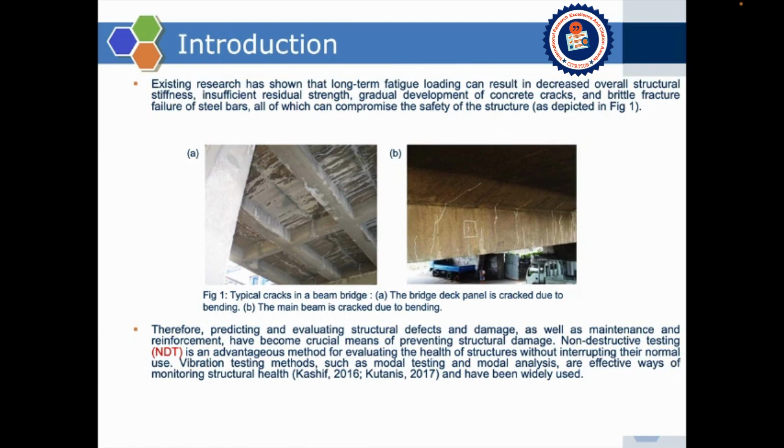However, comprehensive finite element model research is still lacking in analyzing fatigue damage on structures without relying on experimental data. Thus, it is essential to develop a numerical model to comprehensively evaluate the damage suffered by structures under high cyclical fatigue loads.

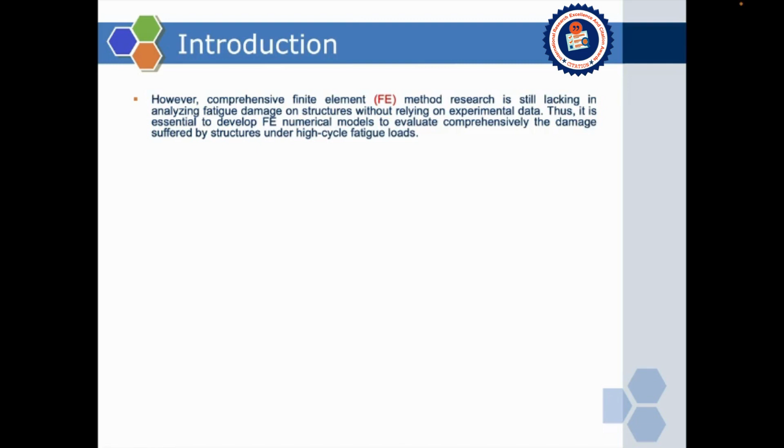Literature review: for this part, we focus on the fatigue performance of concrete and rebars, and the monitoring technologies. For concrete, fatigue loading can induce residual strain accumulation, resulting in a continuous increase in the deformation of the structure and the spread of cracks.

It was found that the elasticity modulus degrades as the number of cycles increases, and the stress level substantially impacts the fatigue life of concrete, which decreases as the stress level increases. At the same time, the fatigue life of specimens tested at high frequency decreases.

For steel rebars, the PM study showed that the cumulative fatigue damage to the reinforcement was linear under the action of steady high cyclical stress amplitude. Under this action, the elastic modulus of the steel bars remains unchanged, but their cross-sectional area gradually decreases due to the formation of microcracks, resulting in instantaneous brittle fracture.

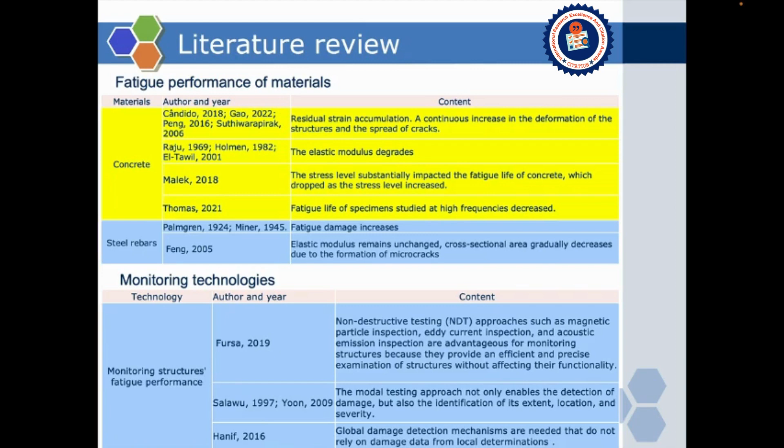Measuring the fatigue performance of structures is critical to reducing their damage and ensuring safe operations. However, accurate local damage area location before testing is difficult, time-consuming, and requires sufficient space to accommodate inspection devices, which is not always feasible. Therefore, global damage detection mechanisms are needed that do not rely on damage data from local determination.

Limitation number 1: the available information does not sufficiently quantify the structural stiffness of fatigued structures in relation to the structural integrity and serviceability of existing structures.

Limitation number 2: there is limited information addressing the effects of low cyclic loading and high cyclic loading on structures using the vibration-based NDT approach.

In addition, the implementation of a nonlinear FE model to compute the high cyclic fatigue vibration behavior of RC slabs remains unclear. So we aim to assess the fatigue performance and the dynamic progressive damage behavior of reinforced concrete slabs under high cyclical fatigue loading using nonlinear FE analysis.

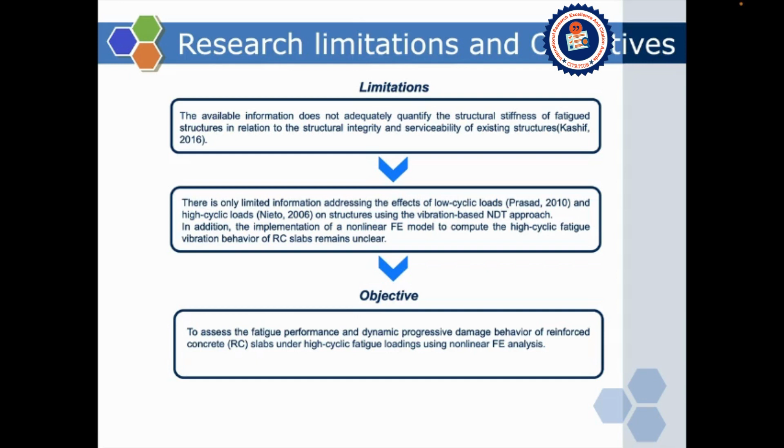The methodology: this study includes the following methodologies. The research involved using a nonlinear FE analysis model to evaluate the fatigue performance and the dynamic progressive damage behavior of RC slabs under high cyclical fatigue loading.

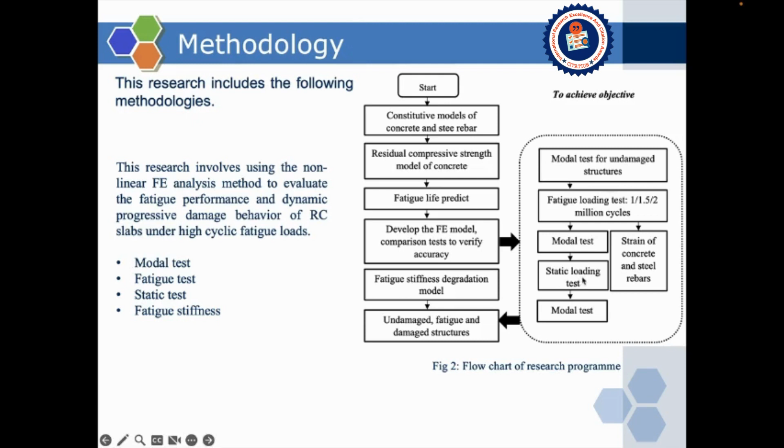It includes the modal test and the fatigue loading test, modal test, static loading test, and the last is the modal test.

The following details of FE are presented in detail: the modeling process, boundary conditions, and the mesh sensitivity analysis. Firstly, the key to the modeling process is the selection of suitable concrete and reinforcement models, the prediction of concrete reinforcement life, and the arrangement of the models.

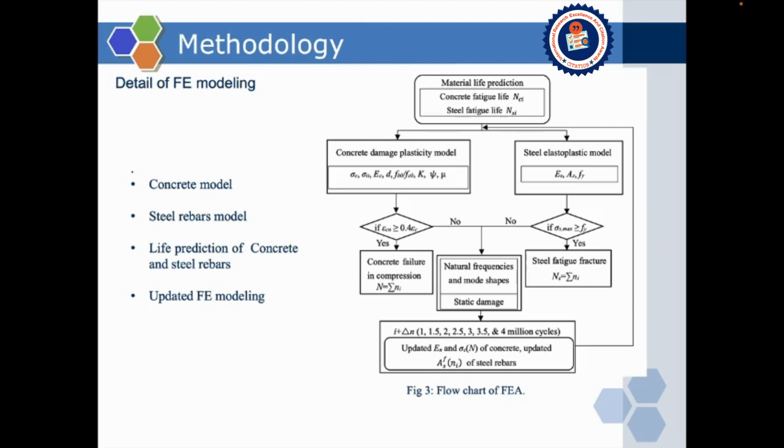Next, we adopted the same boundary conditions as for the test. Loading was also carried out in the same way as the test. Thus, the maximum and minimum loads were 65 kN and 20 kN respectively.

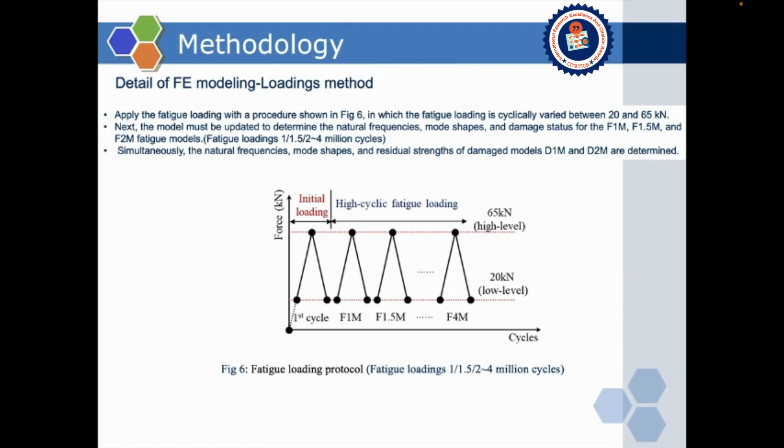The models were mainly calculated for 1.5, 2, and up to 4 million cycles. Prior to the calculation, a mesh sensitivity analysis was carried out to ensure the most accurate prediction with the shortest computing time.

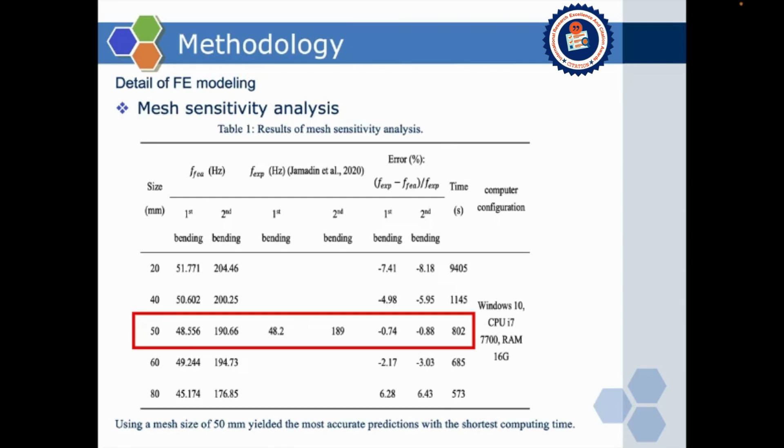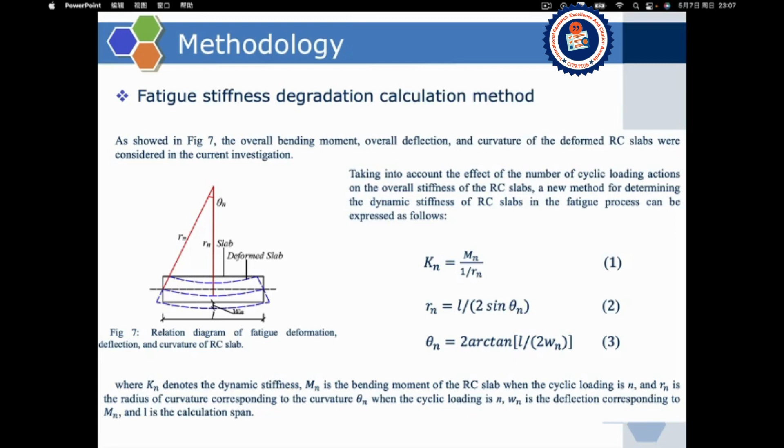As shown in figure 7, the overall bending moment, overall deflection, and curvature of the deformed RC slabs were considered in the current investigation. The fatigue stiffness was calculated by establishing the equation for dynamic stiffness through the geometrical relationship between the vertical loading moment and the radius of curvature.

This part is about results and discussions.

The FE model is validated against experimental test data. The verified FE model is subsequently utilized to simulate the dynamical vibration feature of RC slabs exposed to high-cyclic fatigue loadings. The investigated dynamical responses are natural frequency, mode shapes, and the stiffness of RC slabs.

Validation of the natural frequency of the numerical simulation. Firstly, we calculate the residual strength of RC slabs under 1 cycle, 1 million, 1.5 million,

and 2 million cycle loadings. The results are shown in figure 8. It can be observed from the figure that the generated FE simulation could precisely predict the experimentally observed axial load deflection curves of RC slabs.

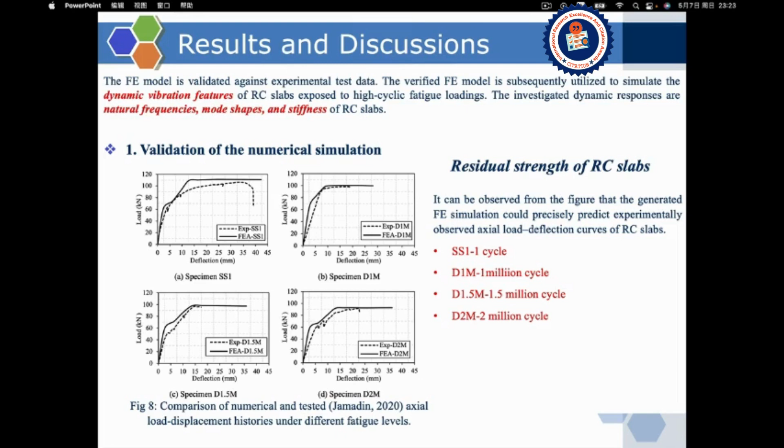Secondly, we calculate the modal test of fatigued and damaged RC slabs. Comparison between FE and experimental results in terms of natural frequency and mode shapes of fatigued and damaged specimens are shown in Table 2 and Table 3.

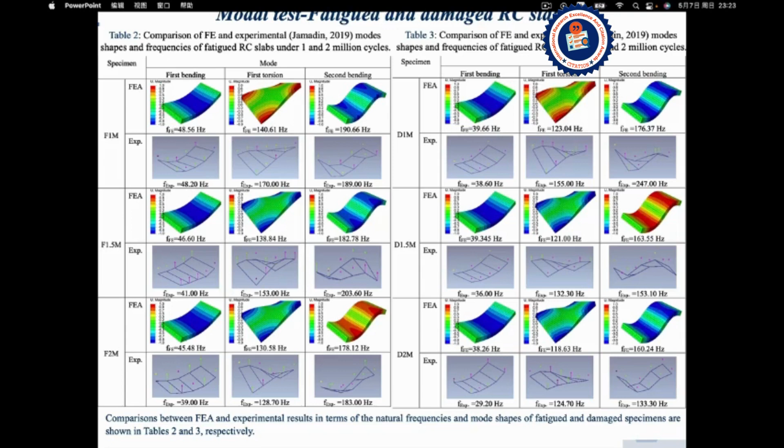Besides, we did the correlation analysis with the above data. The minimal value is 0.9655, so we can make sure that the developed FE simulation could predict the mode shapes and natural frequency of the specimen with acceptable accuracy.

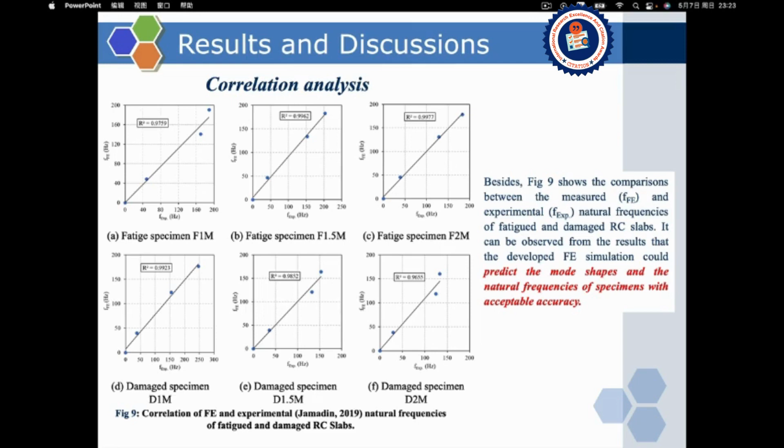Finally, we extend the analytical results from 2.5 million to 4 million loading cycles. The results show the same variation as those subject to smaller loading cycles. Hence, the mode shape is independent of the number of loading cycles.

Under the same loading cycle, the damaged specimens' natural frequency was lower than those of fatigued specimens. Besides, the natural frequency was reduced by increasing the fatigue level.

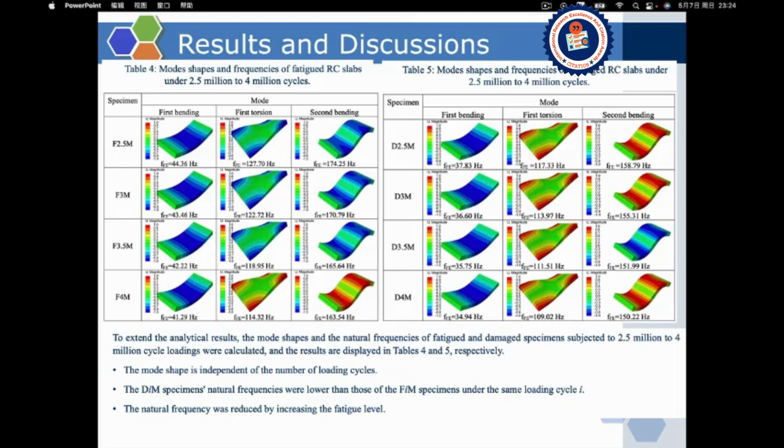Fatigue damage evolution of steel rebars and concrete. It could be observed from the stress and strain of concrete and steel rebars that the overall curve can be divided into 3 stages: initiation, steady response, and failure.

Among the 3 phases, the durations of initiation and failure were relatively brief, whereas the stable phase accounted for more than 93% of the entire vertical fatigue life.

Throughout the whole fatigue loading cycle, the strain of the steel rebars grew slowly within the first 2 million cycles, then intensified quickly between 2.5 and 4 million cycles, as well as the tensile strain of concrete developed rapidly,

causing cracks to propagate to the compression zone, as well as the tensile strain of concrete developing rapidly, causing cracks to propagate to the compression zone, hence reducing the concrete compression zone and the bearing capacity of the RC slab.

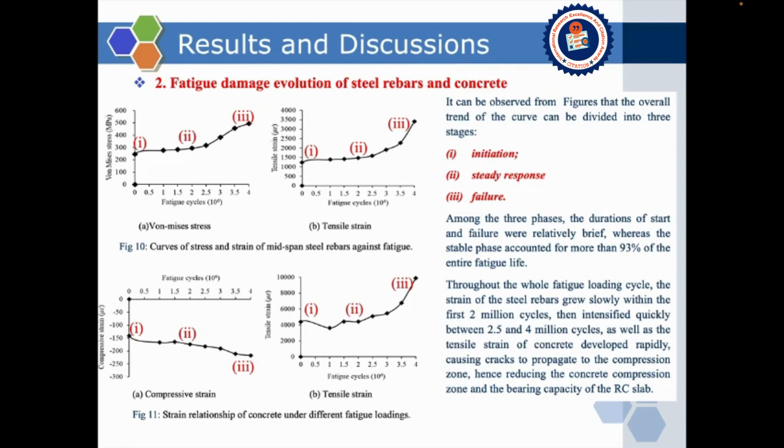The vertical cracks initiate in the middle of the RC slabs adjacent to the loading points, where there was a pure bending portion of the RC slab, indicating the beginning of crack distribution in RC slabs.

It was found that the number of cracks increased as the cyclic loading increased. Besides, the initial vertical cracks gradually spread to the compression section of the RC slabs along with the cyclic loading.

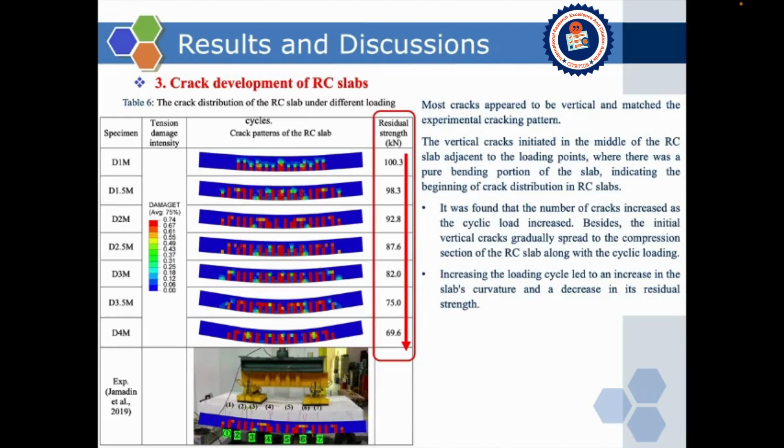As indicated in Table 6, increasing the loading cycle leads to an increase in the slab's curvature and a decrease in its residual strength.

Sensitivity analysis of natural frequency degradation. We calculate the natural frequency of undamaged, fatigue, and damaged specimens from 1 cycle to 4 million loading cycles.

The results indicate that the natural frequency of the fatigue and damaged RC slab decreased continuously following static loading, which could be attributed to the irreversible nonlinear behavior of concrete.

Therefore, it could be concluded that an increase in the fatigue level leads to a reduction of the structure's natural frequency and therefore its stiffness. The comparison of results revealed that for a particular mode number under the same number of loading cycles,

the natural frequency of the damaged specimens was lower than that of the fatigue specimen. Besides, the RC slab's natural frequency declined rapidly during the earlier stage of fatigue and thereafter slowed considerably at a later stage of high-cycle fatigue.

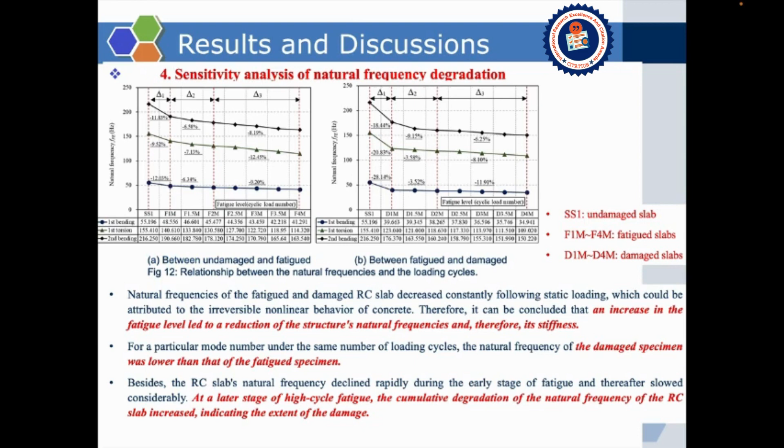The cumulative decrease of the natural frequency of the RC slab increased, indicating the extent of the damage.

Analysis of high-cyclic fatigue stiffness degradation. As shown in figure 13, we compare the stiffness of RC slabs subject to low and high stress levels from 1 cycle to 4 million cycles, as well as compare the stiffness degradation between low and high stress at the same cycles.

In figure 14, the stiffness reduction rate depends on the applied stress level. Compared with low stress level, the reduction in stiffness was more pronounced under high stress level conditions.

It could be observed from the figure that the dynamical stiffness degradation rate gradually increased with increasing loading cycles. The reason could be attributed to the development of damage in the slab, leading to the reduction of concrete stiffness.

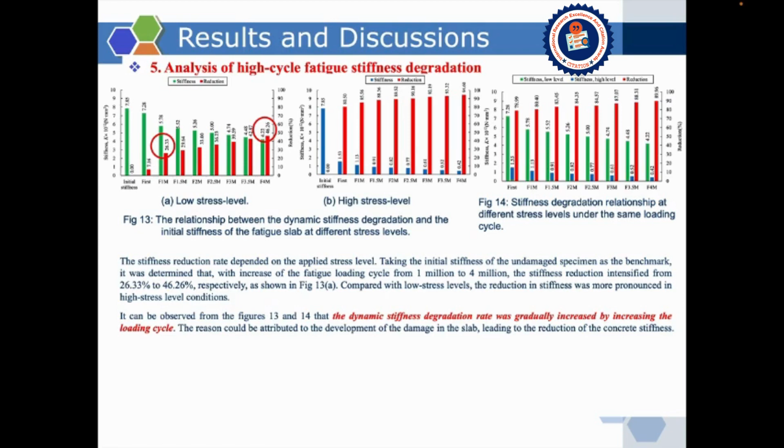This part is about the conclusions.